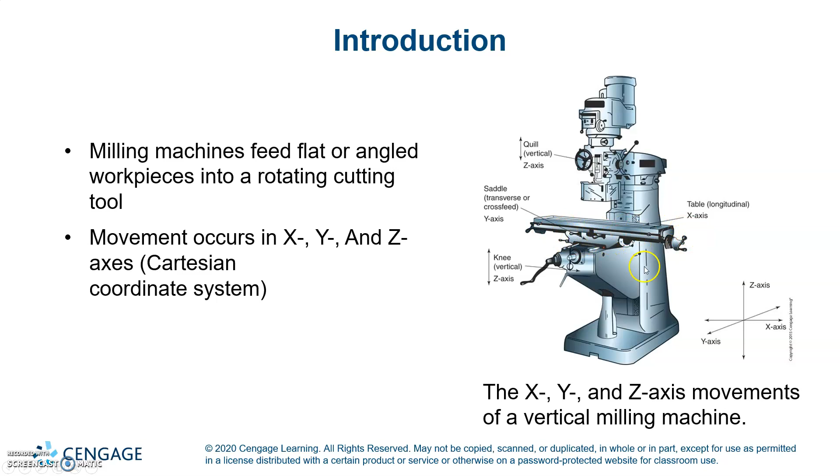The base and column provide a heavy solid foundation for the machine, tying together all major components. These are the major parts of a typical vertical milling machine: your knee, your clamps, and your clamping lever.

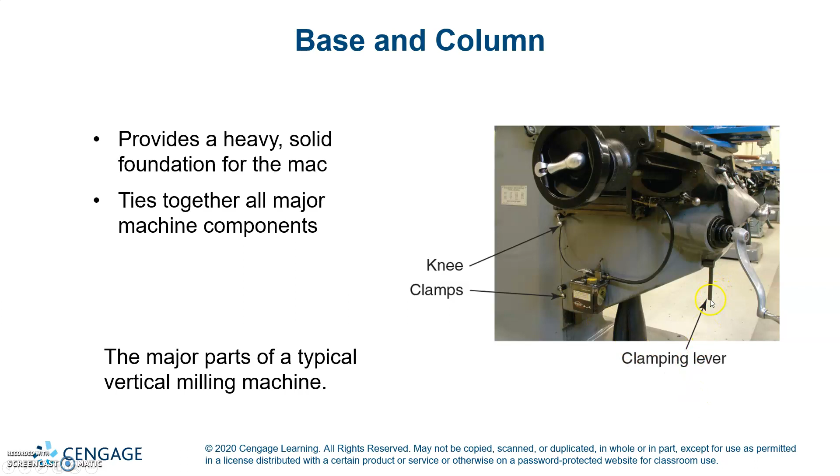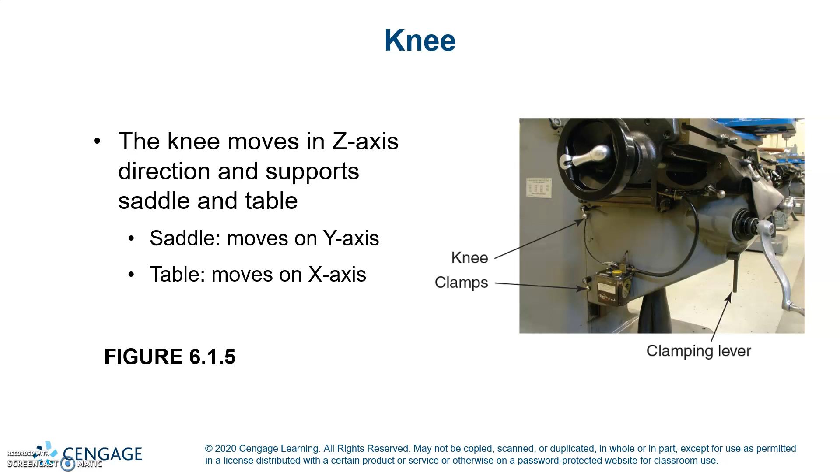The knee moves in the Z-axis direction and supports the saddle and table. The saddle moves in the Y direction, and the table moves in the X direction. The adjustable micrometer collar of the knee elevating crank allows accurate movement of the knee.

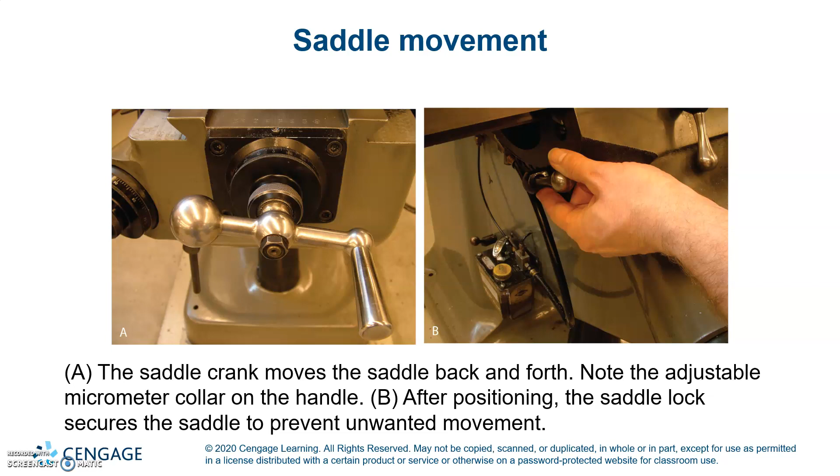Your saddle movement: A on the left, the saddle crank moves the saddle back and forth. Note the adjustable micrometer collar on the table or handle. B on the right, after positioning the saddle, a lock secures it to prevent unwanted movement.

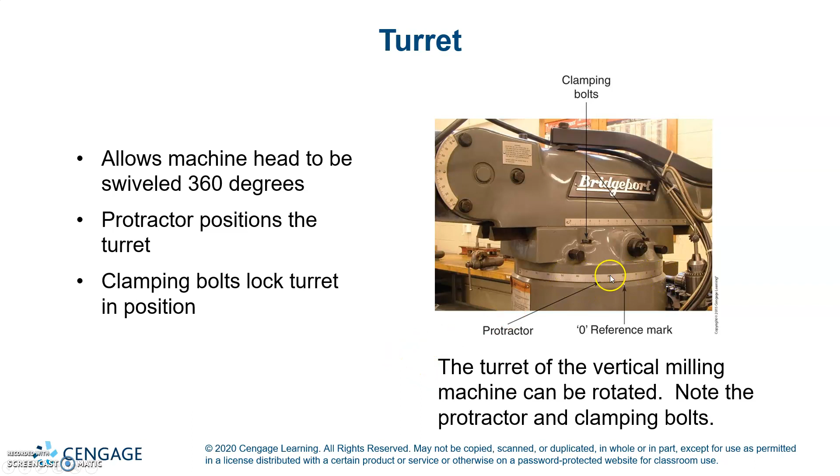The turret allows the machine head to be swiveled 360 degrees. A protractor positions the turret, and clamping bolts lock it in position. The turret of the vertical milling machine can be rotated. Note the protractor, the clamping bolts, your reference mark, and then your clamping bolts.

The ram allows the head to be moved forward and backward, then locked in position. Your clamping bolts are here, and you adjust there. The ram has an adjusting lever and clamping bolts.

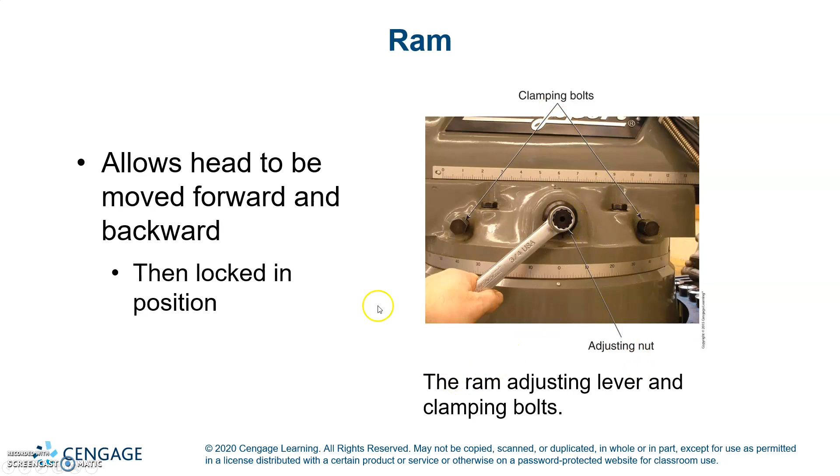The head contains mechanisms for holding, controlling, and driving cutting tools. It houses the spindle, a precisely ground shaft used to rotate cutting tools, and the quill, which telescopes in and out of the head to feed hole-making tools or position cutting tools prior to movement in the X, Y, or Z axis. It can rotate 360 degrees to machine angular surfaces or produce angled holes.

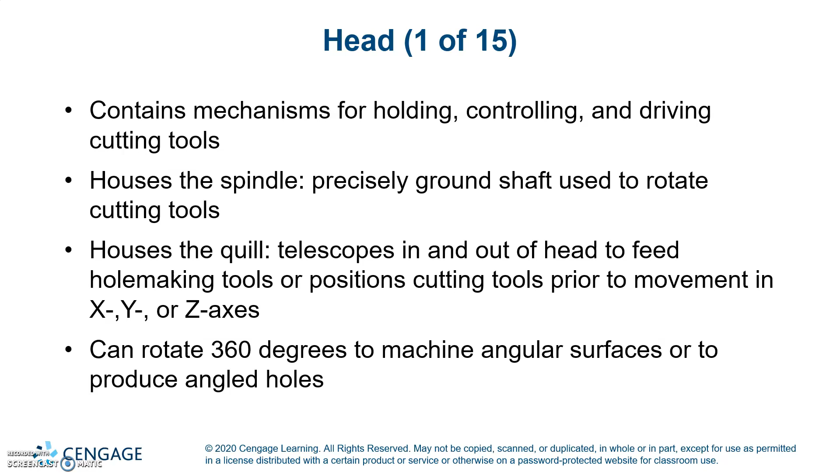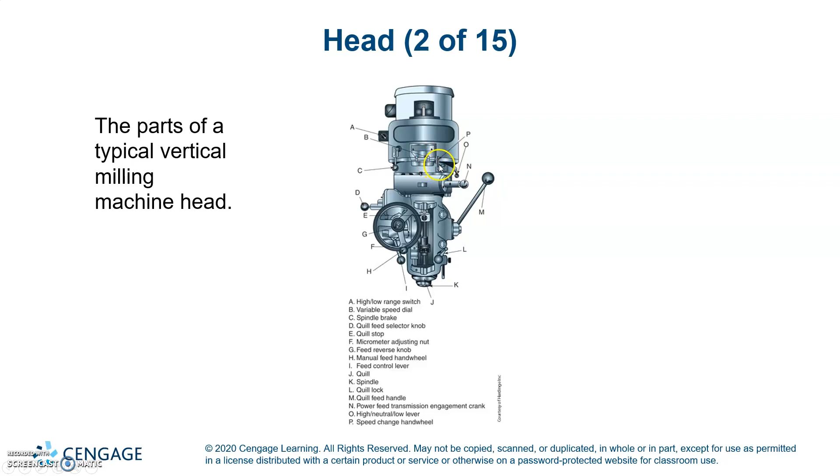O is your high, neutral, low lever, on the side of the motor there. P is the speed change hand wheel, a little hand wheel right here to move it up and down in speed.

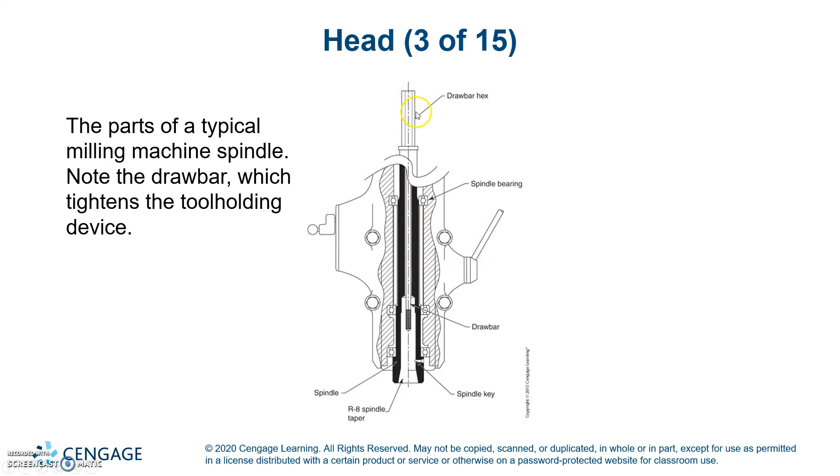The parts of a typical milling machine spindle, note the drawbar which tightens the tool holding device. You'll loosen this to drop the collet or whatever else may be in there.

Your vertical mill high, neutral, low gear change lever, which we just talked about. The vertical mill variable speed control.

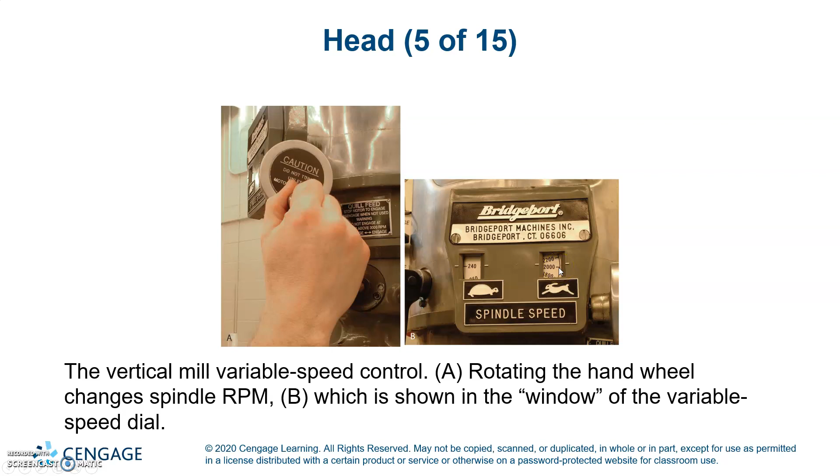A on the left, rotating the hand wheel changes the spindle RPM. B on the right is shown in the window of the variable speed dial. So right now, if you're in low gear, you're going 240 RPM, whereas if you're in high, you're going about 2000 RPM.

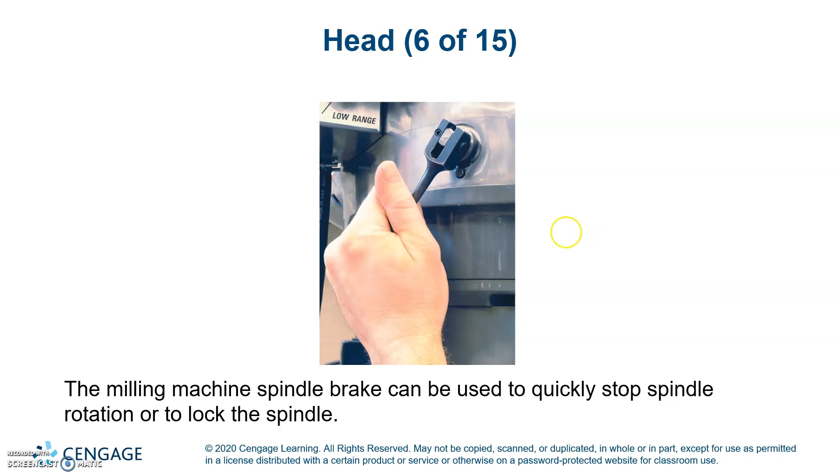The milling machine spindle brake can be used to quickly stop the spindle rotation or to lock the spindle. The micrometer adjusting nut can be set so that the quill stop limits quill travel.

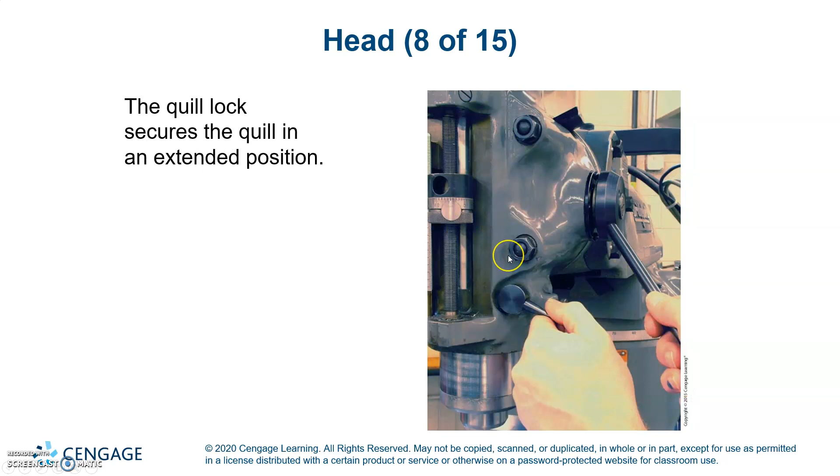The quill lock secures the quill in an extended position. The power feed transmission engagement crank engages the quill power feed gear train mechanism.

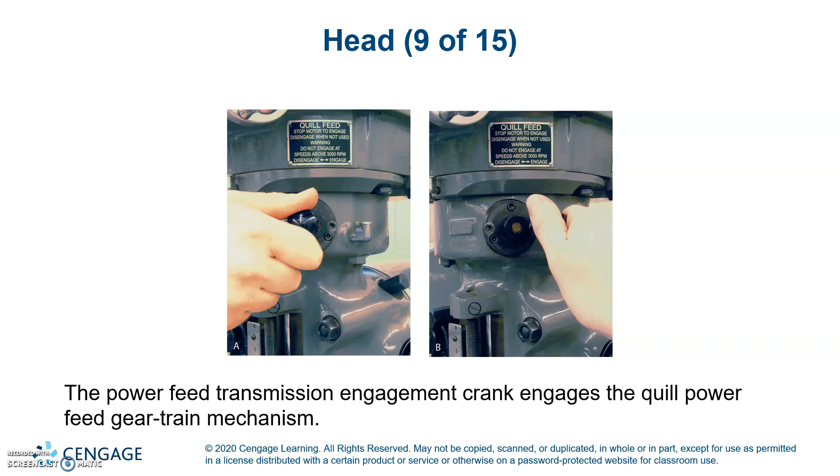The quill feed selector knob is used to set the quill feed rate in inches per revolution. The feed reversing knob sets the direction of the quill feed.

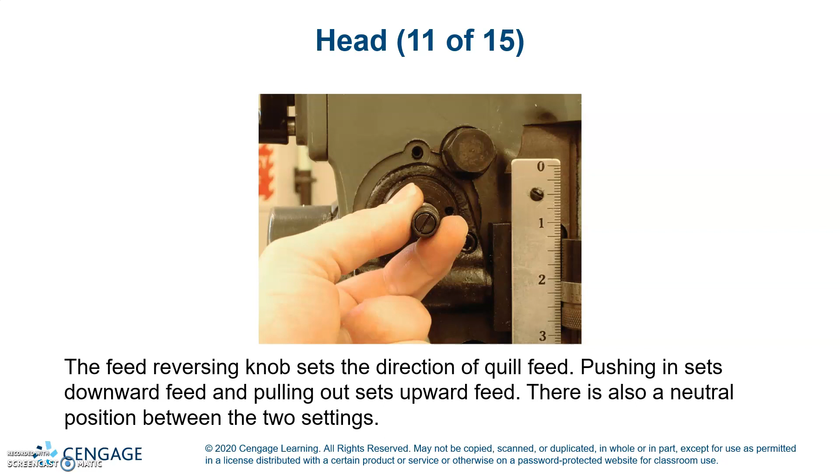Pushing in sets downward feed, and pulling out sets upward feed. There is also a neutral position between the two settings. Pulling out the feed control lever begins power quill feed, which will automatically disengage when the quill stop reaches the micrometer adjusting nut.

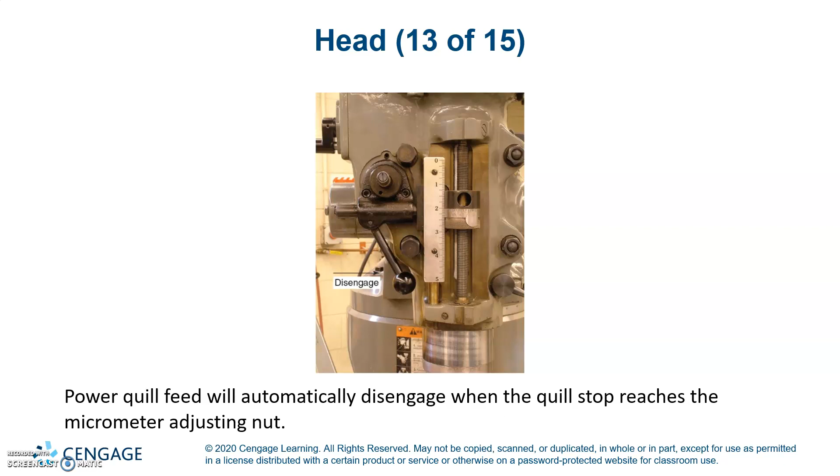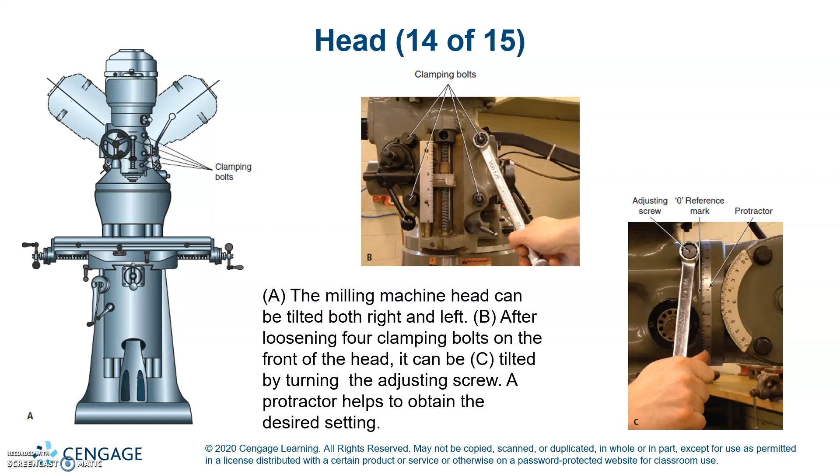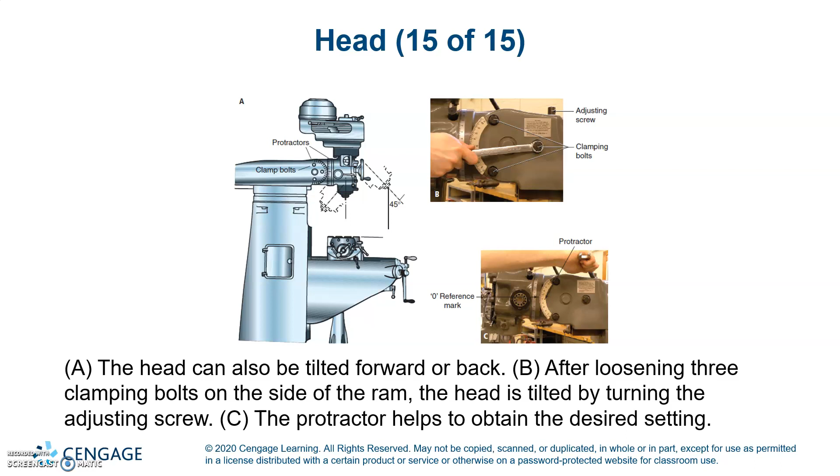The head can also be tilted forward and back. After loosening three clamping bolts on the side of the ram, the head gets tilted by turning the adjusting screw. The protractor helps to obtain the desired setting.

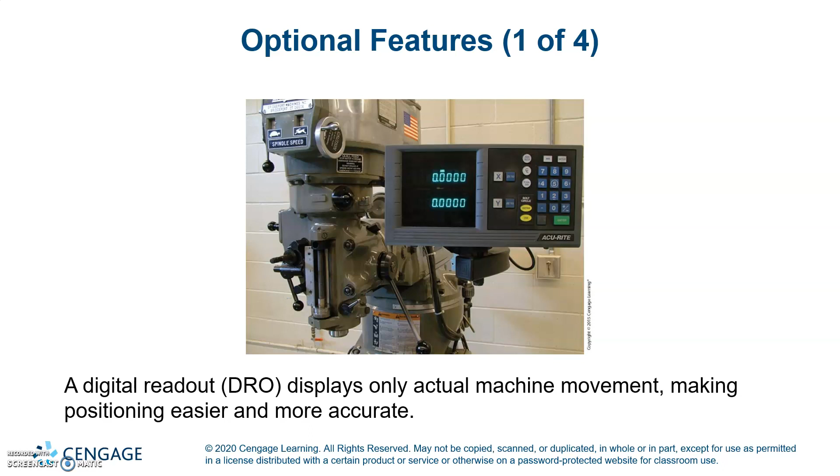Optional features: a digital readout, or DRO. It displays only actual machine movement, making positioning easier and more accurate. You don't have to worry about backlash.